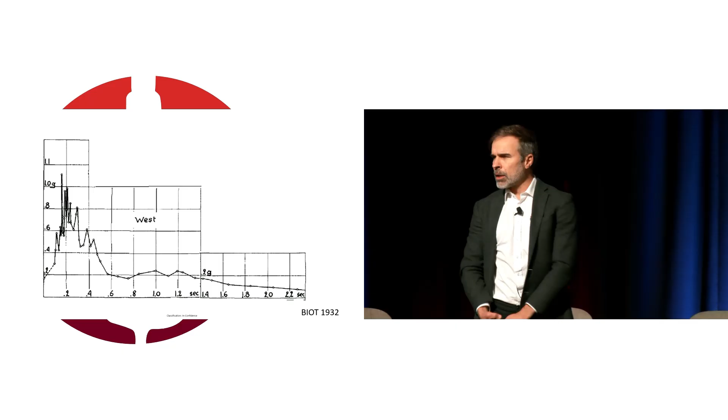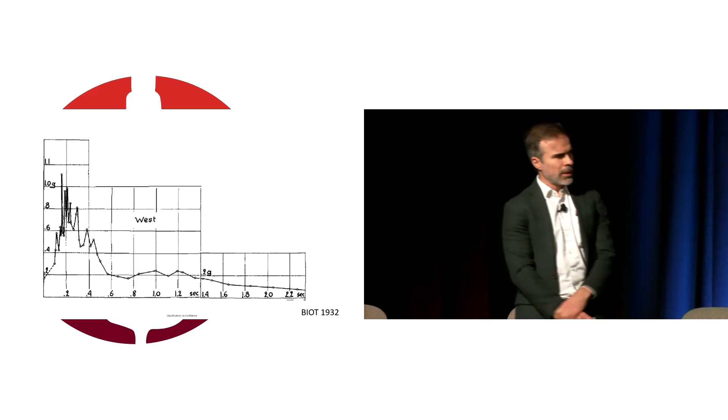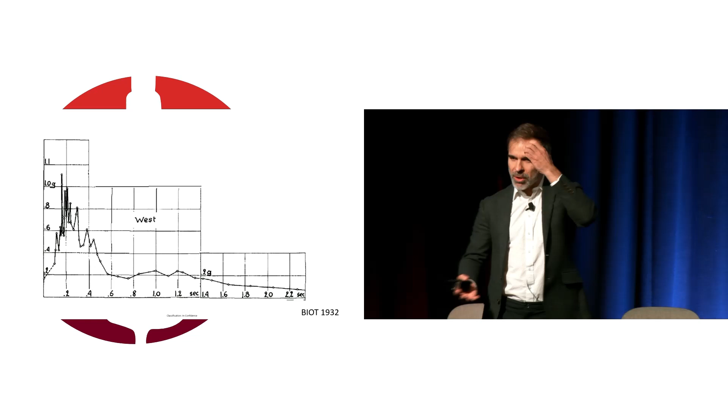At about the same time, or a few years later, on the other side of the world, in California, at Caltech, they discovered, so to speak, the earthquake spectrum. I would like to think most of us here are very much familiar with it. Well, there are really three spectra we should think about: the acceleration spectrum, which I'm showing here, the velocity spectrum, and the displacement spectrum. But the one that most of us look at, the one that was first introduced and most people pay the most attention to, was the acceleration spectrum.

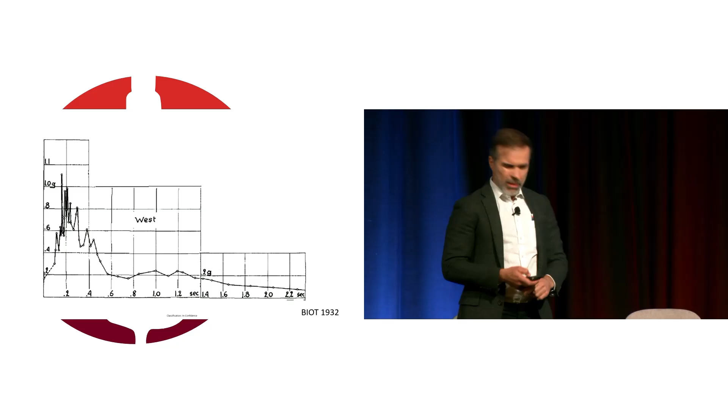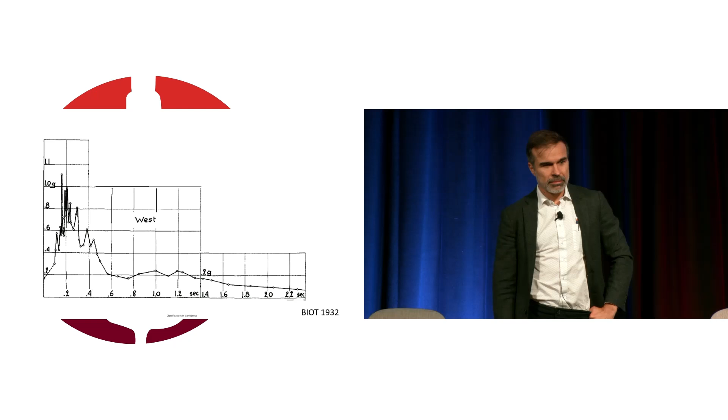And in that sense, that's a tragedy, and I'll explain why. But the idea was, look, as the period gets longer, you get less acceleration. That must be good, the Californians thought. Well, that went in the exact opposite direction of what Naito said.

And that went on for a while, to the point that the first codes in America said precisely that: make your structure flimsy, so to speak. I don't want to say flexible, because flexibility gets mixed up with deformability, and those are two very different things. Flexibility is the inverse of stiffness, and that refers to the initial slope of the load deflection curve. But that's very different from deformability, which relates to how far you can push, bend, or distort something. Those are very different concepts.

And God, even when I go to Wellington and I get on an Uber, I'm always tempted to ask, aren't you worried about the next earthquake? And very often they start teaching me and saying, oh well, no, our houses are very flexible. That's good.

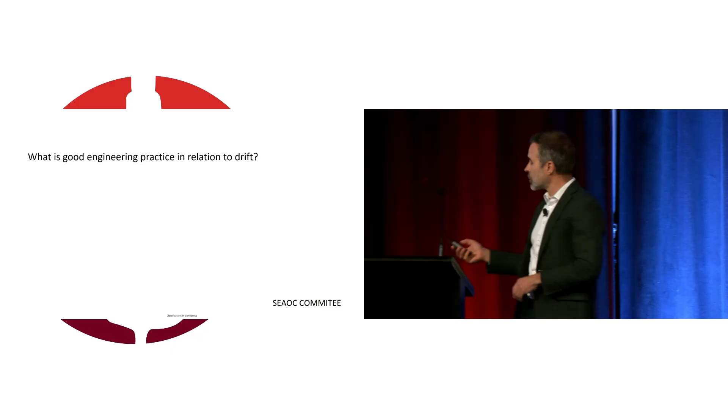Before that, this same committee in California was asked, when they proposed this idea to concentrate on forces and have this minimum base shear, they were asked, what about drift? What about deformation? People had heard of Naito and his ideas. So they said, oh, we entertained the question of drift. We thought about three things in relation to drift: health and safety, non-structural elements, and something they called motion sickness.

As if a building in an earthquake was something like a boat. Nothing like that. Anyways, they say very interesting things.

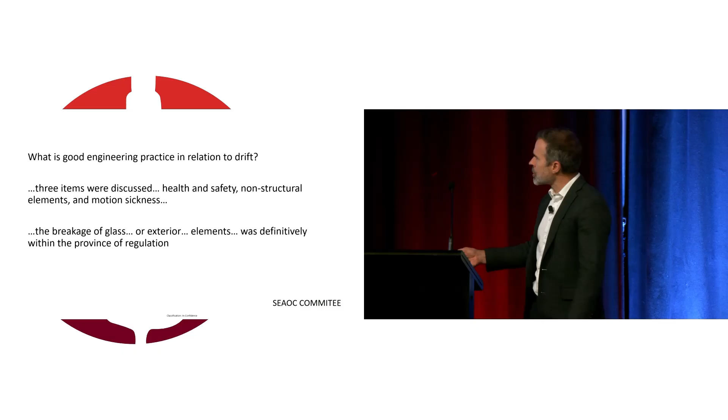This is a report that came along with the building code. It says, well, yeah, if there's too much drift, the glass might break, and things from the facade might fall, and that should be regulated because that might hurt someone. But other than that, these other ideas that you need to protect the non-structural elements.

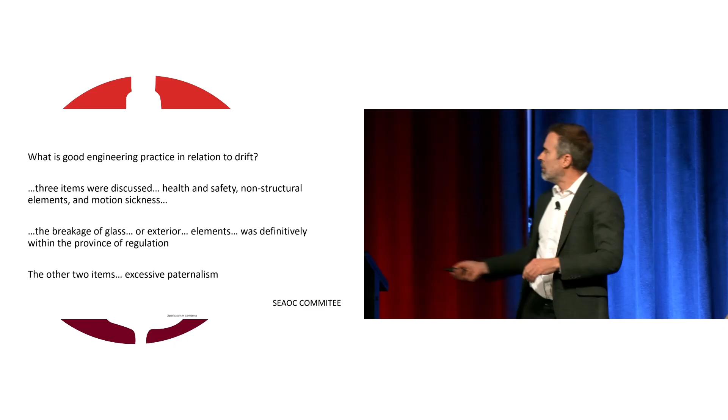The first keynote yesterday was talking about protecting the asset, protecting the investment. And this other thing about what people might feel or not, that's excessive paternalism. We don't need to worry about drift. And in fact, they say right there in their commentary, we're not going to say anything about drift or deformation in the code. That doesn't belong to the code.

And as I was indicating earlier, that kind of thinking went on for quite a while. This quote says lateral displacement is seldom critical in a building. That quote was given by these very smart, very important people who made a big difference in our profession, as late as 1961. Forget drift.

It took until 1980 or so, although the exact date for the reference is 1981. This citation refers to something that was presented in Istanbul, by this guy, Mete Sozen, who in 1980, at the World Conference in Istanbul, on the basis of experimentation, made the case that we actually have to pay a lot of attention to drift and deformation, or displacement, whatever you want to call it.

I wanted to show this picture because it shows the level of deformation to which they subjected these models of buildings. And I also wanted to show this picture because I always find this portrait of Jack Moehle, whom you might know, very amusing. Yeah, those were different times, eh?

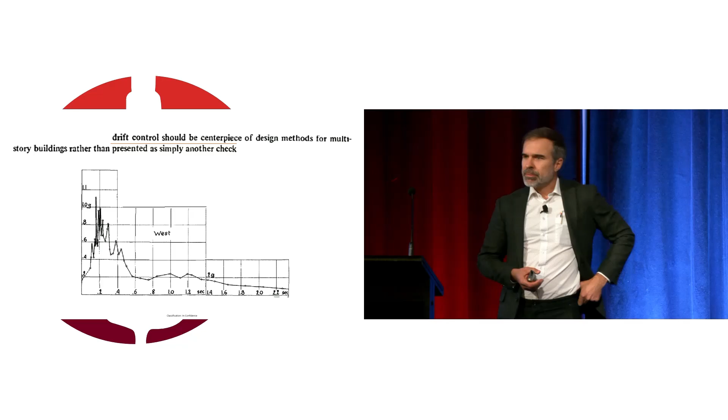In a way, what they were saying is that, yeah, we've been looking at the acceleration spectrum thanks to the amazing work by Biot and so on, but we should, in fact, be looking at the displacement spectrum, because displacement is what drives damage. It's the distortion that drives damage. That's what breaks the stuff that the insurance company has to pay for all the time.

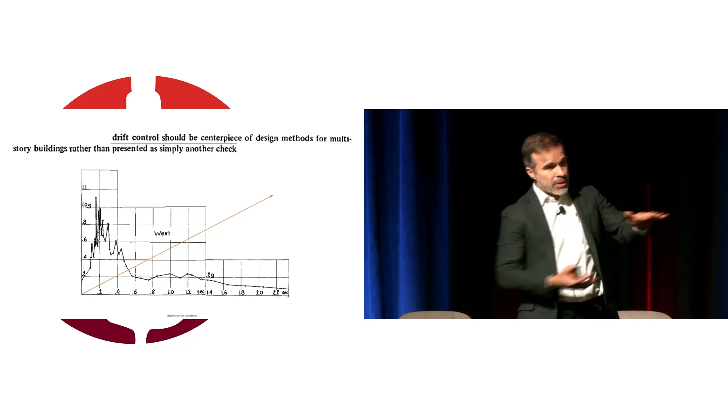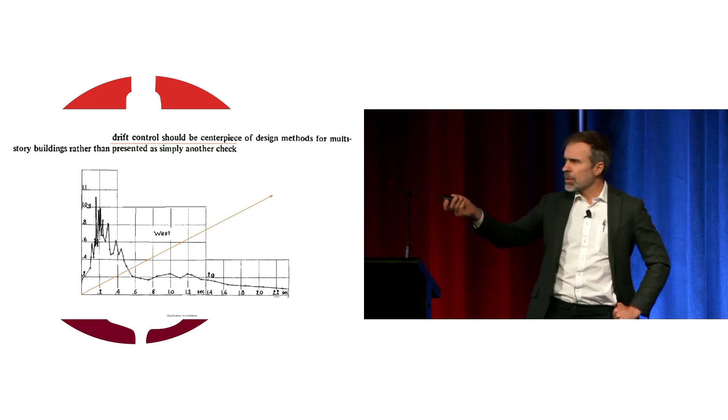In a way, what they were saying is that, yeah, acceleration may be decreasing as you increase period, but the displacements do the opposite. The flimsier your structure, the longer its period, the more it distorts. And that means the more likely you are to get into trouble, in terms of what may happen to the structure, and certainly the more likely you are to get into trouble with all these expensive finishes, facades, doorways, and so on.

I'll address the issue of the acceleration-sensitive components in a moment. But for now, let me just say that this idea kind of caught on slowly, but it did catch on. And by now, there are at least two books out there that speak of displacement-based design or drift-driven design.

But even more interesting, there's been a lot of evidence that we've been looking at, that we've been collecting, that supports this idea that, again, can be traced all the way back to Naito. The idea that robust, stiff buildings do well. And Mr...

Lucas from the Insurance Council was asking for evidence that we can design better so they can lower our premiums. There's evidence. This photo I took in 2010 in Viña del Mar. This building had already gone through the 1985 Viña del Mar earthquake, and then the Maule earthquake. We were not allowed in at first because it was fully occupied. Eventually we became friendly with one of the owners, and they showed us you could barely see cracks in the walls at all. The worst thing was one picture frame had made a mark on the wall. These buildings have done very well.

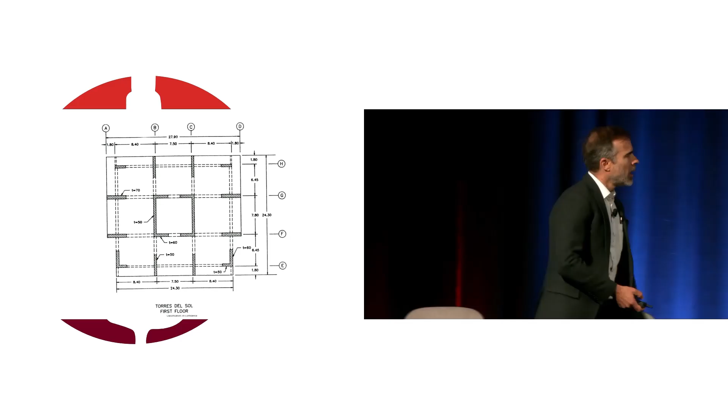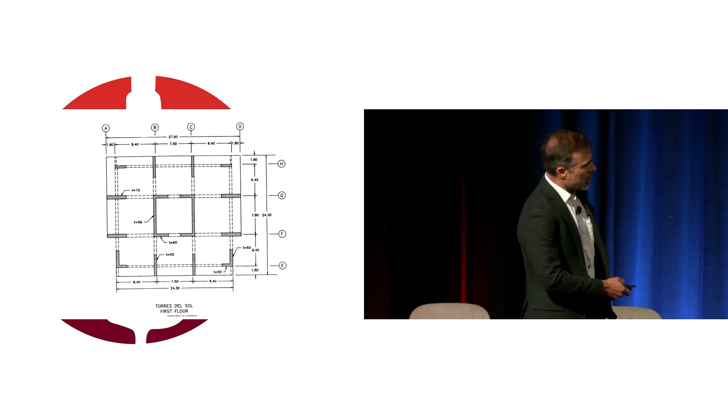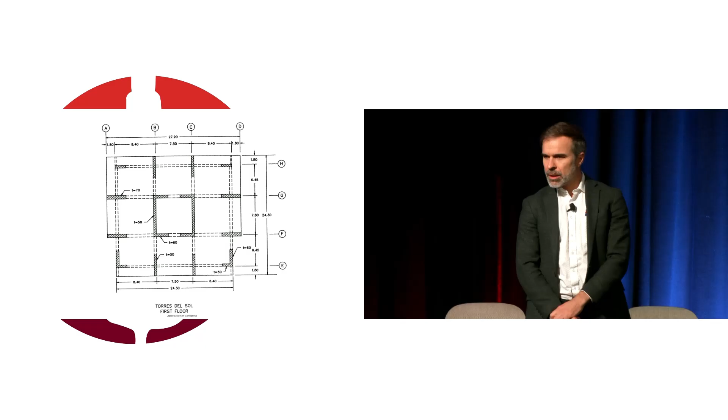These buildings in Chile are famous for having robust, stiff walls. Everything hatched in gray here represents reinforced concrete wall. I love this drawing because it shows the thickness of these walls - 60, 70 centimeter thick walls, no joke, and lots of them. So much wall that it takes 6% of the floor area of the building, 3% in each direction. But that has worked very well.

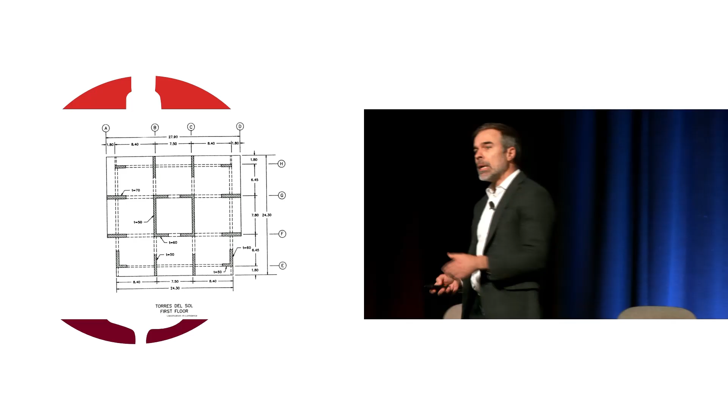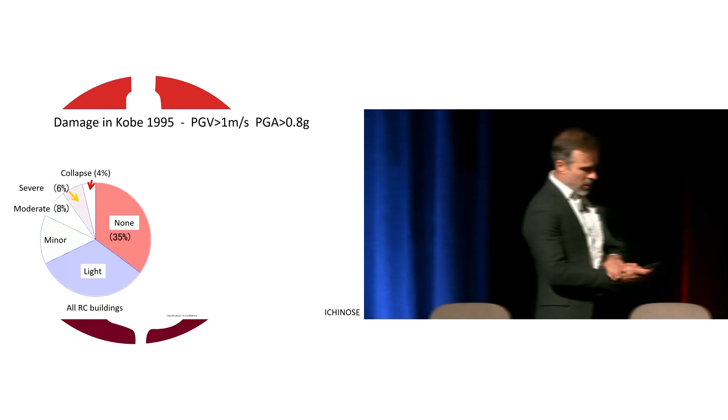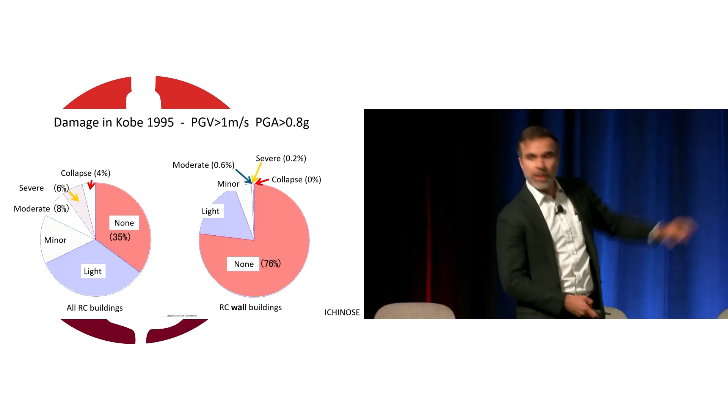It has worked very well in Chile, as Ruben can tell you about better than I can. It has also worked very well in Japan. I borrowed a slide from Professor Toshi Ichinose, who collected data related to the Kobe earthquake. It shows how much damage has occurred to reinforced concrete buildings in Kobe - these are all the buildings grouped together. He contrasts this with damage occurring in wall buildings. I think we can all agree the wall buildings are much less likely to have severe damage, or damage at all, never mind collapse. The wall buildings have done quite well.

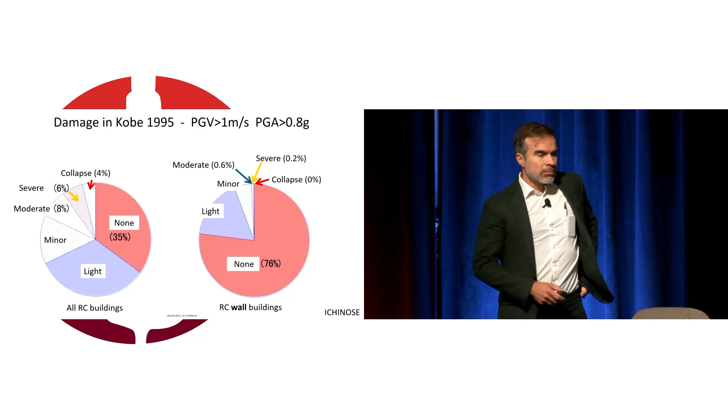This is having an impact. We're talking about functional recovery and so on here, and we have plans to change things over a fairly generous time frame. Other countries are not feeling they have much time anymore.

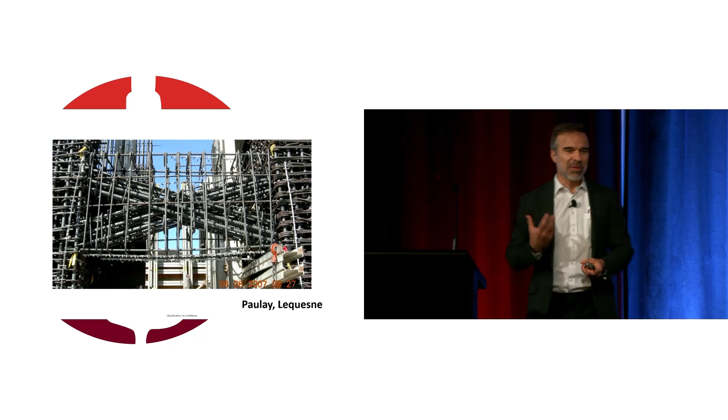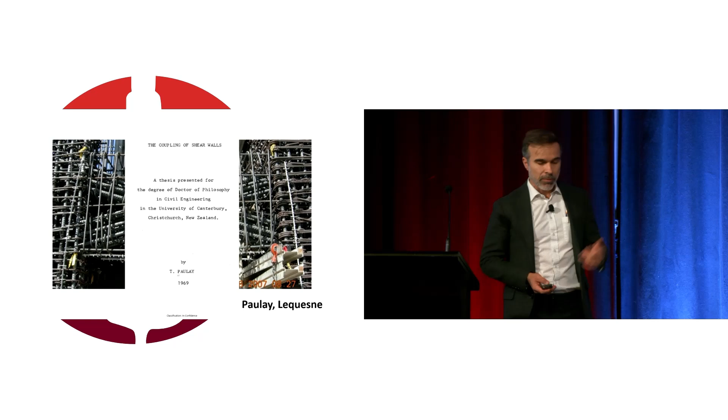But finally we did figure that out, and thanks to that, we have abundant transverse reinforcement in our structures now. I wanted to make direct reference to the work of Tom Paulay, who did a lot to improve the way in which we design coupling beams. We've done a lot to improve the response of reinforced concrete to shear, and thank God for that—I'll allude to this later. If it wasn't because of that, what happened in Christchurch would have been much worse.

So that's a second example where it has taken us a while and a few surprises to change the way we do things. I'd like to now give you another example. In this case, I want to talk about the role of strength and the role of dissipation in response, at least of reinforced concrete.

Again, Naito, back in the early 1920s, said strength is not so critical, just to have enough. That's hard to swallow, right? You think the more strength, the better. So I wanted to show you these tests done in 1979 by Dan Abrams at the University of Illinois, where Newmark worked, and then later Sozen worked too, and Abrams was there with them. They tested, in this case, two building models.

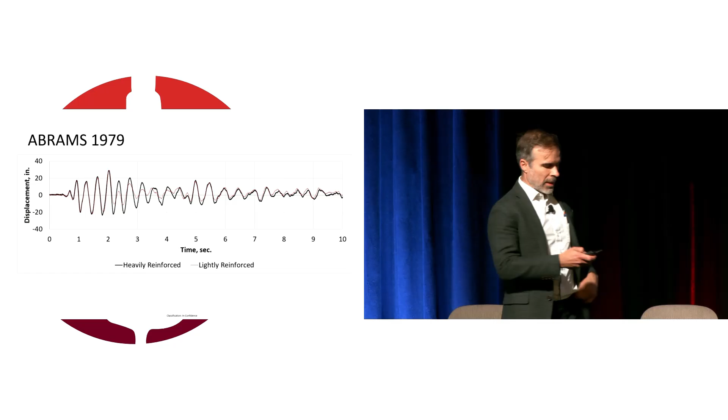Both buildings were pretty much the same geometry-wise, except one had a wall with a lot of reinforcement, and the other had a wall with 4 times less reinforcement. That was the main lateral load resisting system, one wall. One was essentially 4 times stronger than the other. Look at the difference in response - you can probably not even see it, or if you do, you don't see it very well. That's the point I'm trying to make. One building had 4 times more reinforcement, in many ways 4 times stronger. That didn't matter. The response was essentially the same.

We still struggle with that in our profession. We're so obsessed with forces that we don't quite see that often. And it still bothers me, and it has bothered many people.

In 1984, another Japanese researcher, Shimazaki, went on to test that idea with numbers, not on a shake table but with numerical models. He looked at oscillators with different load deflection characteristics. I'm going to concentrate on two of these - the one he called Model 2, and the one he called Model 4. What he was trying to do was answer the question: is it true that if I make something much stronger, the response really is not that sensitive to strength?

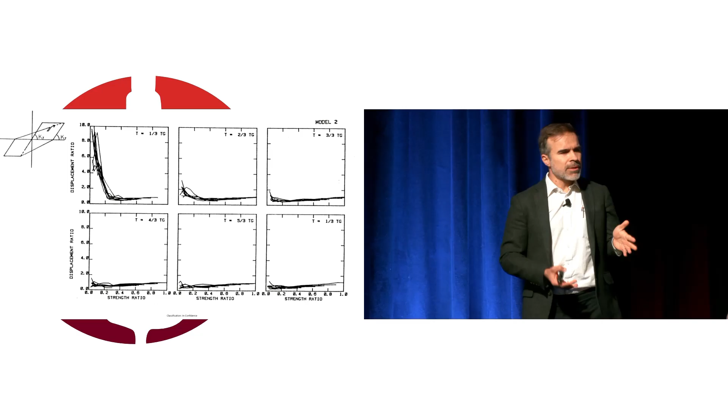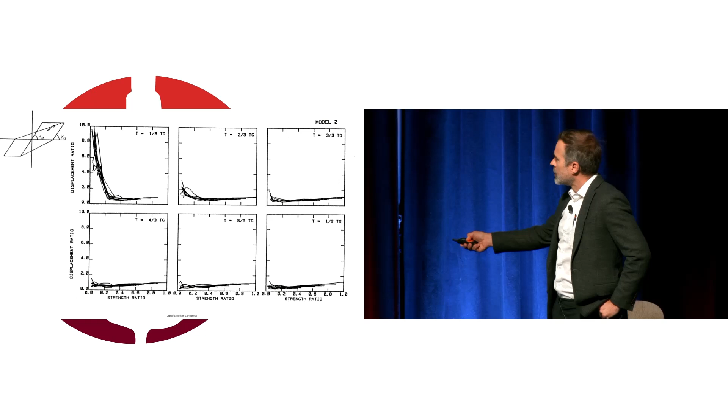Is that true? It's hard to believe. He created these very ingenious plots where the x-axis represents strength, and the y-axis is a measure of displacement. You have different plots where the variable between plot and plot is period - short period, slightly longer period, and so on from left to right and top to bottom. These plots showed Shimazaki that displacements were fairly constant despite strength varying very much from left to right, except for the oscillators with very short periods.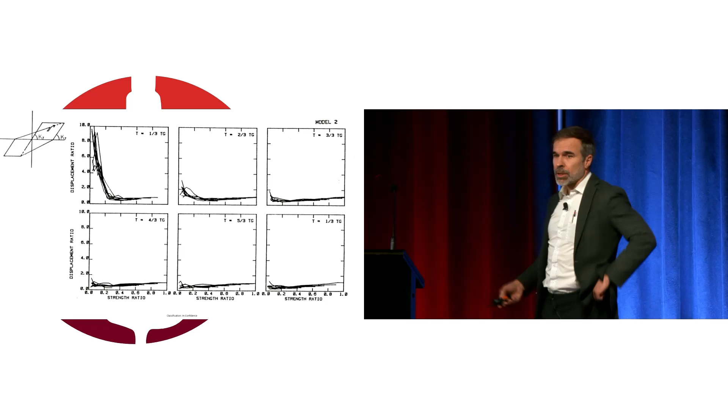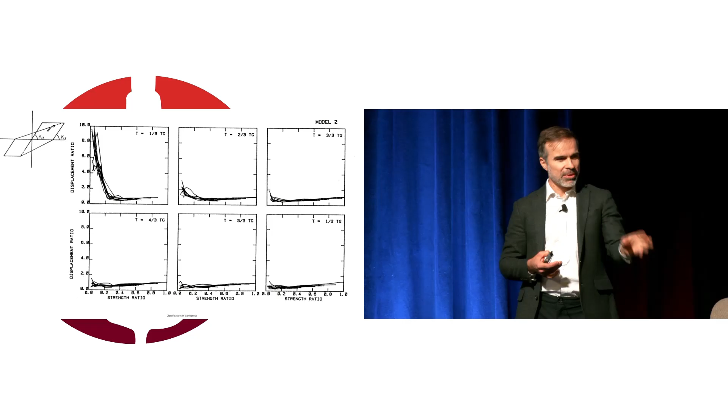So strength didn't matter, except for the very short periods. That is why, until very recently, what we did with short periods was different. Remember, we divide by k-mu and multiply by something else - we multiplied by mu. For short periods, k-mu and mu are different. Well, they used to be. Now, in the new TS 1170.5, that's no longer the case. I'm not very comfortable with that, because what happens in very short periods is different.

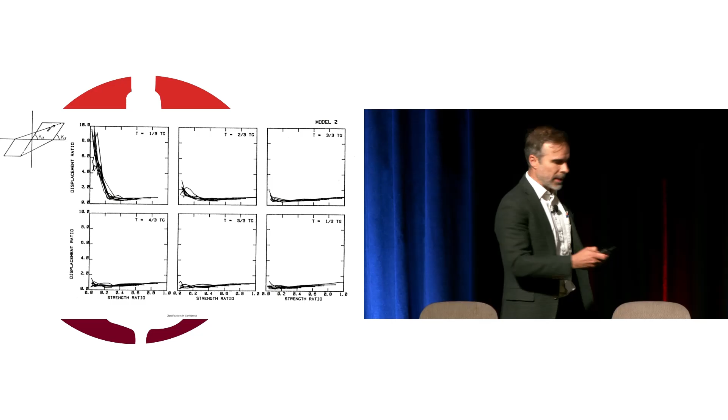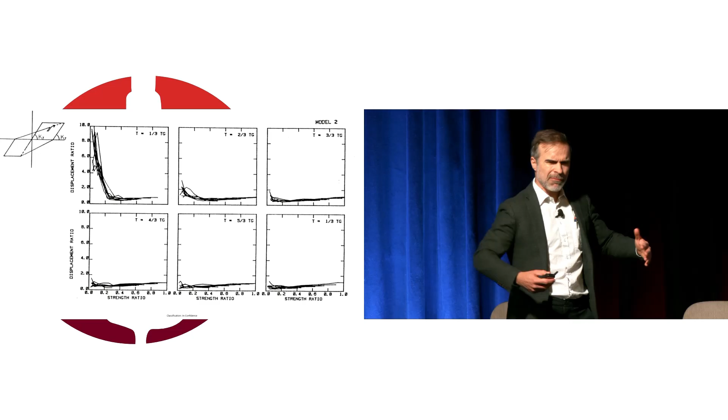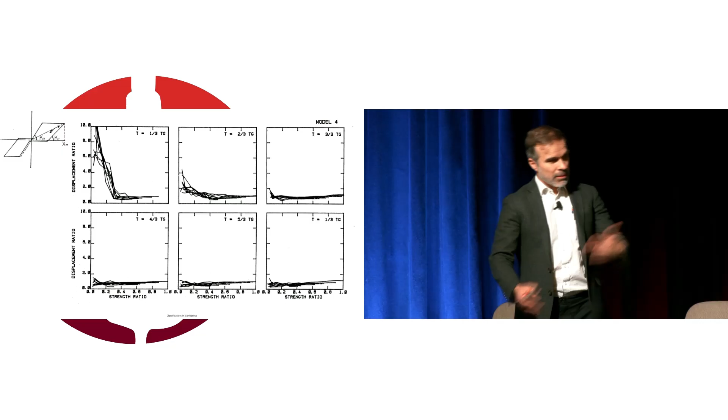But never mind that - for a wide range of the domain of possibilities, strength is fairly unimportant, like Cross said. This is what Shimazaki saw for this type of oscillator. I want to show you what he saw for the other type, Model 4, which had a lot of what they call pinching - much less fat loops, like this. This is oscillator 2, this is oscillator 4. Not much difference. One has very narrow loops, and the other doesn't.

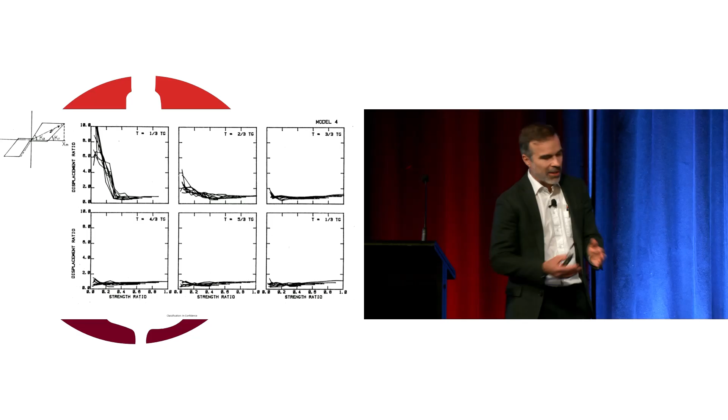This was later confirmed by Nigel Priestley. Don't get me wrong, dampers are great - I'd rather have the fat loops than the narrow loops - but they're not always as useful as we think. That's another surprise that has come about through years of research.

Let me summarize these initial cases by saying that as long as there is good detailing, which took us a while to realize what that meant, demand is best expressed in terms of deformation. That's sort of the essence of these back-and-forths and trial-and-error exercises that have led us to where we are right now. But that refers to deformation demand.

Now I want to switch to the other side of the equation, deformation capacity. For deformation capacity, when I went to school, they taught us to think of these things called plastic hinges. If you dig, the concept of plastic hinge is actually quite old - it was first introduced in 1954 by McCollister and Siess, again at Urbana, Illinois. The essence of the idea is that if you have an element like that, with shear and moment and so on...

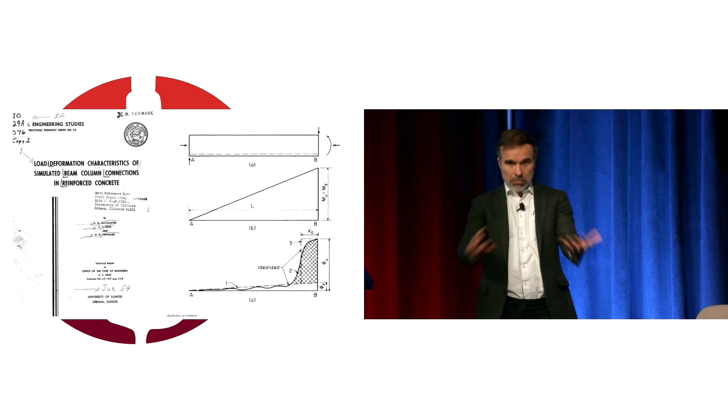You might have a moment diagram like this, but your curvature diagram will have a region where bending concentrates - a region where things yield and become plastic. We call that the plastic hinge, and everyone in this room has heard of plastic hinges. Everyone who has ever opened a structural or earthquake engineering book must have seen this equation describing how a plastic hinge works. Those of you who have been in my classroom might realize this actually has to do with the second theorem of the moment-area theorems. This is based on mechanics that at the moment seem hard to argue against.

Geometry. Strain divided by distance to neutral axis gives you curvature, and again, the theorems help us go from curvature to deflection. Hard to argue against all of that. Well, here's another surprise.

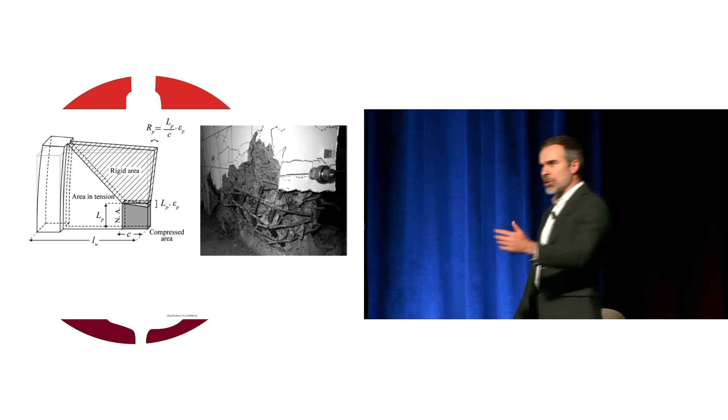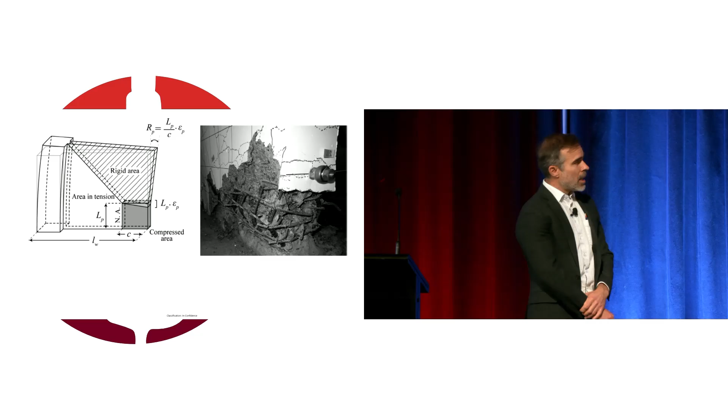After the Chile earthquake of 2010, people noticed there was a lot of concentrated damage at the bases of walls. And once again in Japan, Takahashi and Ichinose were wondering what happened. And they did these tests.

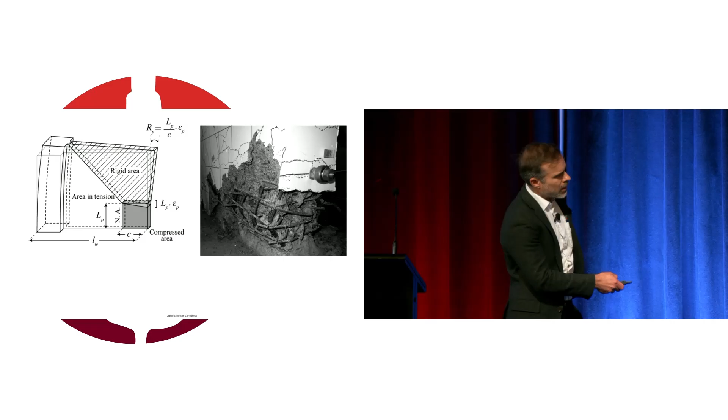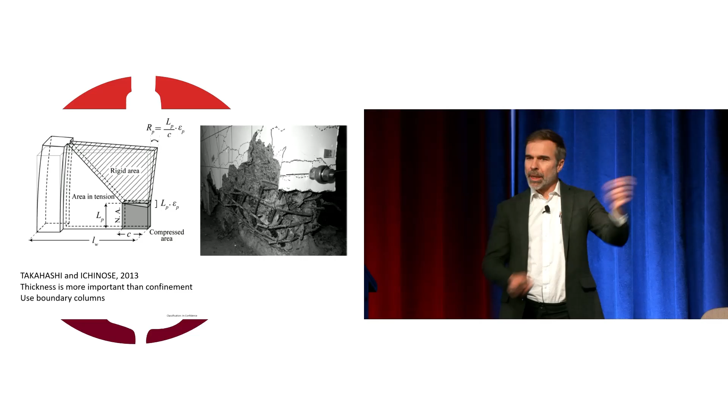They observed, again, a lot of concentrated deformation at the bases of these walls. And they produced this cartoon in a paper they published in 2013, where they say, well, on the side of tension, yes, the plasticity may be spreading over a long plastic hinge, if you will. But on the side in compression, the plasticity is not spreading. It's concentrating. And that area seems to have to do with the thickness of the element there.

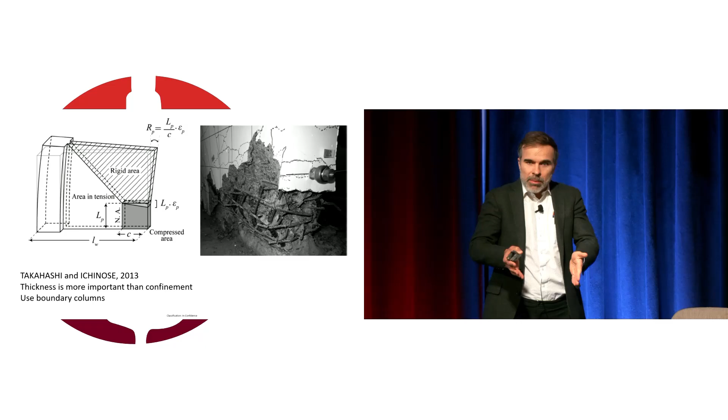Ha! We never thought of that until 2013. So in that sense, this wasn't working at all, according to Takahashi and Ichinose, because we always thought this quantity that we call LP, which refers to the length of that area of plasticity, we always thought that's related to the depth of the element, not the thickness. I mean, we're sort of an order of magnitude off there.

And sure enough, if you look at measurement in the y-axis versus calculation based on that equation, things don't look very good, do they?

There are many reasons. The initial tests by Mattock were done on beams tested in one direction. There were no cycles, those were beams. Now we're looking at walls, and the walls are subjected to cycles. And the mechanism of failure can be anyone's guess. Bars buckle and fracture under low cycle fatigue. Sometimes the wall sort of buckles out of plane. There's so many things going on beyond what the equation that we put our trust on is based on.

And people have been trying really hard to address that. These are pictures that show all the things that were tried by Carlos Arteta and Jack Moehle, who came back from Chile saying, shoot, the plasticity isn't spreading as we thought. We need to figure out how to make the compression zone longer. They tried all these configurations in elements subjected to compression to try to spread the plasticity, so to speak.

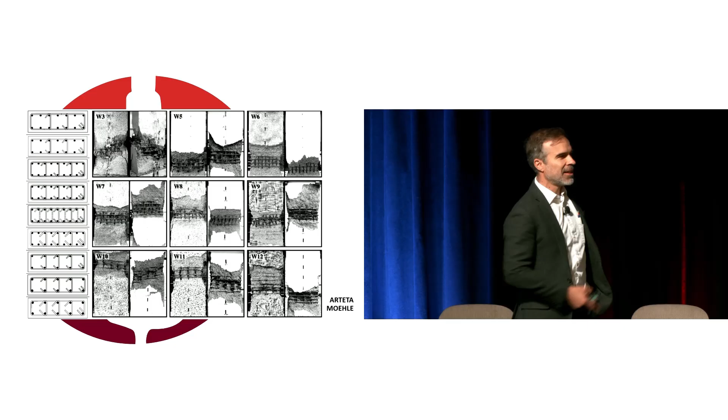Didn't work. In every test that they did, the deformations in the compression side of the wall concentrated. And that's why today, when we try to calculate the deformation capacity of things, we don't use mechanics anymore. This is kind of embarrassing. We use regressions. That's a regression.

Very good regression. Nothing wrong with the idea of regression. In fact, it's a little bit embarrassing in a way. When I was in my master's, I had to write a thesis about deformation capacity of columns. And I didn't know what to do.

So the easiest thing for me to do was to try to figure out some parameters that seemed relevant and run a regression line. And I submitted that with my eyes closed, saying, I'm going to get a lot of heat for this. I expected my supervisors to demand mechanics and geometry and so on. They said, great, this is cool. And we wrote a paper. Then it didn't get rejected. And then, yeah, you know how that feels, don't you?

Other people looked at the idea, and then they introduced more parameters, and they made the regression bigger and better. Thank God they don't cite that initial paper we wrote, they cite the other papers that came later. And I say thank God because it is embarrassing that we cannot solve this question with mechanics, but we have to solve it with regressions.

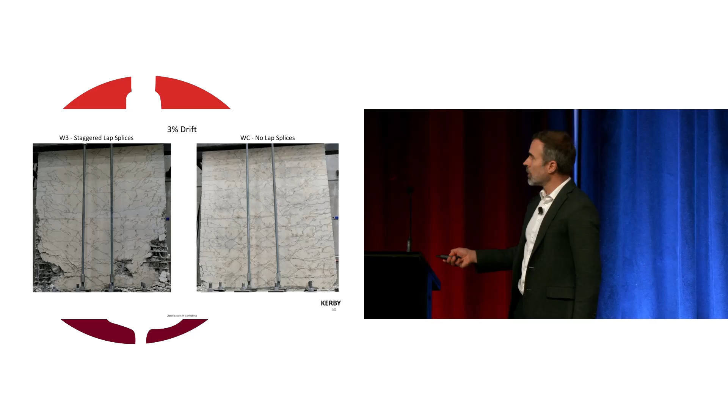What a mess, and it has consequences. These are two of the walls tested by Charlie, one without lap splices, one with lap splices. At the same level of deformation, completely different damage. We don't want that in our building. That's not very easily repairable.

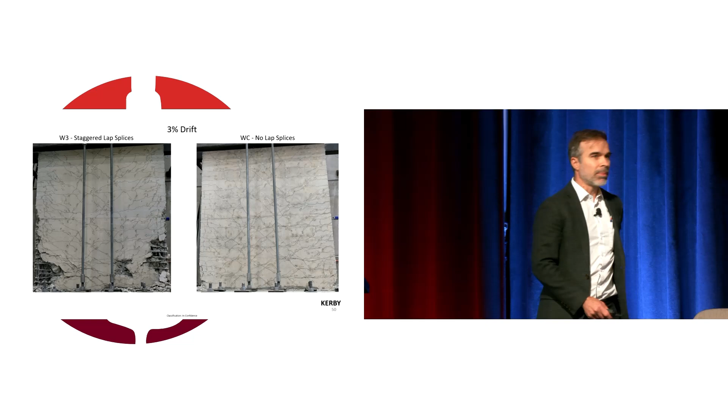As Ken said yesterday, you can repair anything if you throw enough money into it. So yeah, but that'll be a tough repair. That's an example of the kinds of surprises we've run into on the structural side of things.

At least from my biased perspective, I thought I should go a little bit beyond structural engineering, or at least reinforced concrete, and talk about other things. Please give me the benefit of understanding this is not my specialty. I was trained in reinforced concrete, but I do notice that in terms of ground motion, we've run into a whole bunch of surprises too.

To begin with, plate tectonics was only generally accepted in the 1950s or 60s. Just think about that. In that sense, what we do is fairly recent.

We talked about spectra, right? I showed you the first spectrum ever produced by Biot. In the 1950s, Newmark organized ideas about spectra with the famous tripartite plot that most of you must have seen. It's very hard to understand how to read the tripartite plot, so if you didn't bring your tripartite goggles, let me help you there.

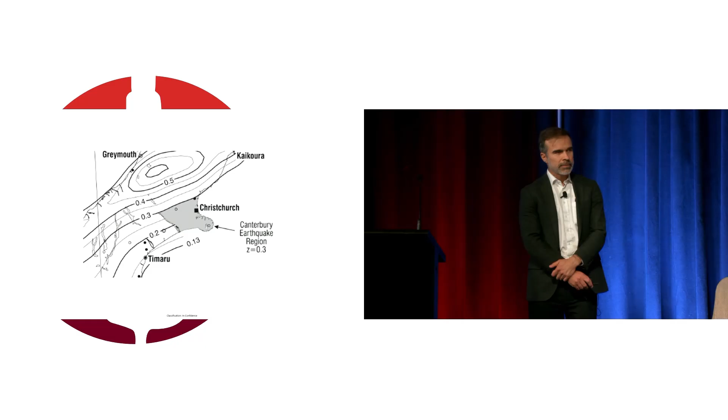And then there's the issue of it was higher than expected. We all know what that feels like, right? Higher than expected. What bothers me is that it keeps happening.

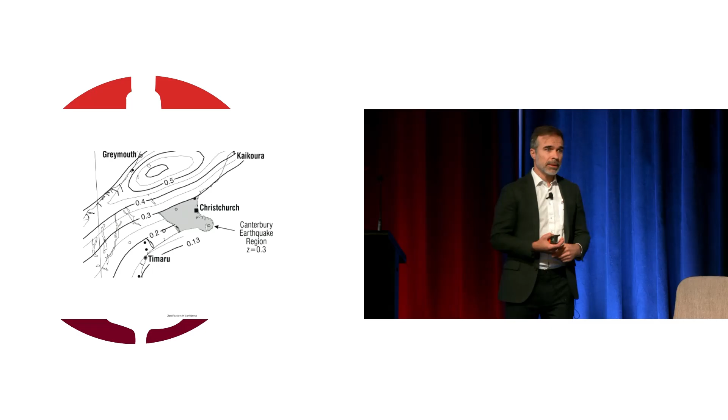Maybe it shouldn't surprise us, given what I just showed you about our records of PGA and PGV and how they keep increasing. There was a very good paper by Strasser recently that says essentially we're going to keep getting surprised because we don't have enough instruments even now to measure all the possibilities. So the more we measure, the more increase we're going to see in our maxima and in our estimated hazards too. And this suggests the same.

Much higher than expected. In Japan, in 2010, they looked at 400 years of historic records. And they figured most of the earthquakes that have affected the north of Japan, the area of Sendai, have been magnitude 7, magnitude 8. And that's because we have ruptures that can occur of certain length, and that makes sense and so on.

2011 comes, not one of those ruptures occurs, but two ruptures happen at the same time. And they don't get a magnitude 8, they get a magnitude 9. And all of you know a magnitude 9 is 32 times more powerful than a magnitude 8. Needless to say, what was estimated initially was quite the underestimate.

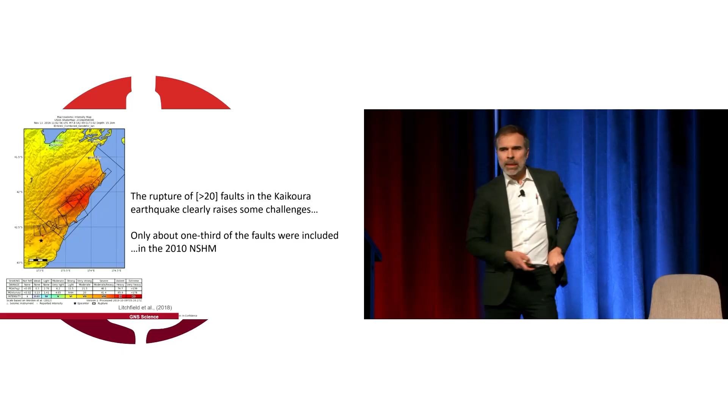And of course, that has happened very close to home too. In the Kaikoura event, 20 or so fault segments ruptured. I was talking about this with Brendan Bradley the other day, and he said, yeah, we knew most of those segments were there. What was really surprising is that they all ruptured at the same time.

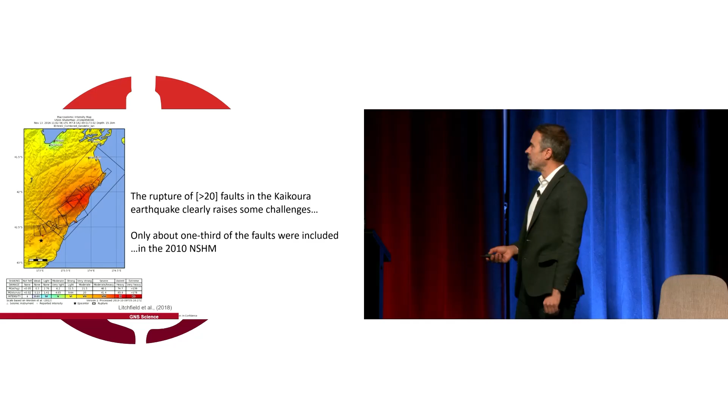Another surprise. And then to wrap these things up, so we can share some questions, let's also admit that because maybe of all these surprises, we're having to change the way we look at things. Also because of what we perceive are the expectations of society. We have realized we don't have to, or we cannot, design just to avoid collapse. We need to design to avoid disruption.

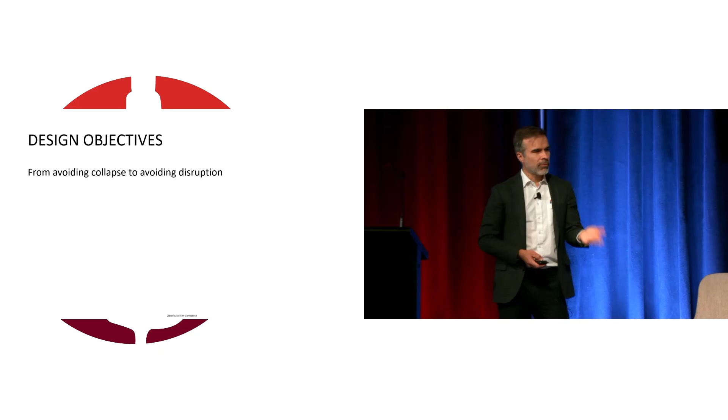Our dear Christchurch is, of course, a very good example of that. Two collapses in an earthquake that exceeded all expectations is a fairly good record. I think we need to thank Park and Paulay for all the effort they invested and all the research they did to teach us how to do better detailing, because I think what saved these buildings was the detailing.

Except, again, for two rather unfortunate exceptions where things were not done the best way. The idea is that ductility saves lives, but it doesn't save the investment. We need to control drift and deformation to control the investment.

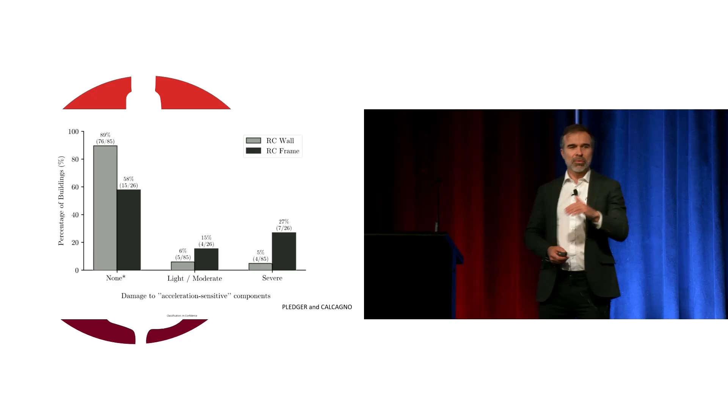This comes from Chile, from Renato Calcagno, whom we've been collaborating with. This is a very interesting plot that Ruben alluded to yesterday. This is percentage of buildings, and this is level of damage in ceilings and sprinklers and so on. We have two types of buildings, wall buildings and frame buildings. What I want you to see is that bad damage to ceilings and piping is more frequent in the frame than in the wall. The wall building, at least in Chile so far, has done better in terms of non-structural damage to things we think are acceleration sensitive.

And Ruben alluded to many possible explanations, non-linearity, maybe a little bit of slip on the foundation, or we don't know. Talk about a surprise. It's hard to believe.

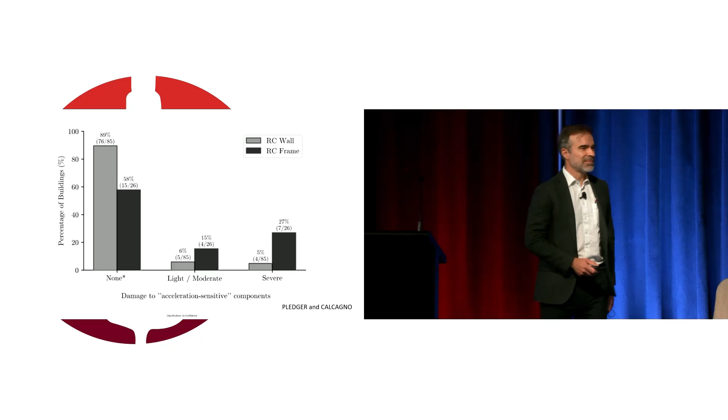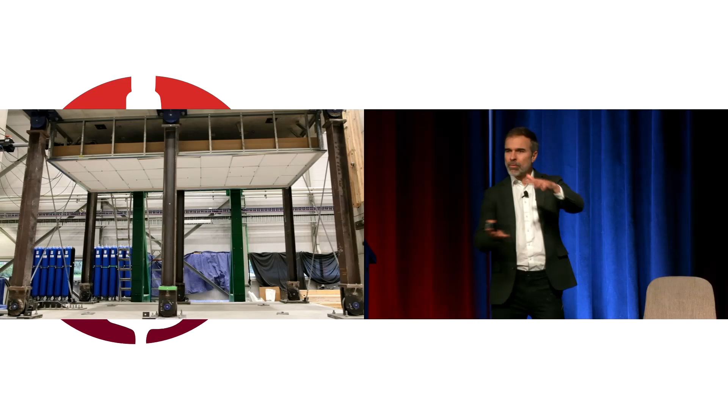So hard to believe that we're running our own tests at the University of Canterbury. We have this brand new simulator where we can move floors independent from one another to try to understand what happens in a... did it play kind of choppy? Oh, that's too bad. Oh, there it goes.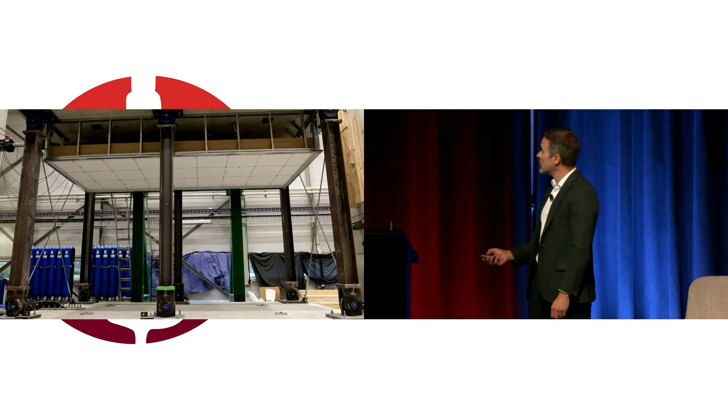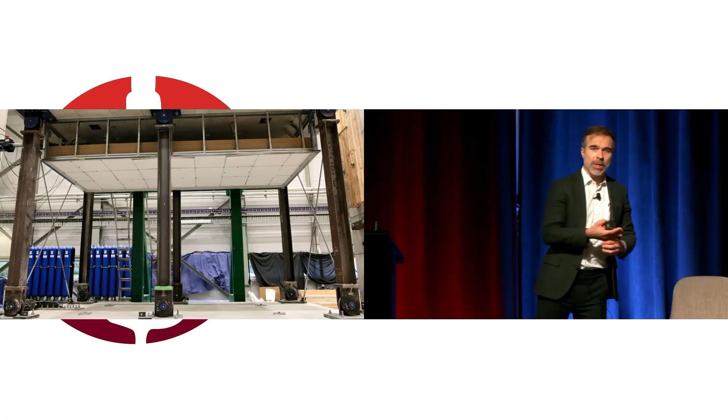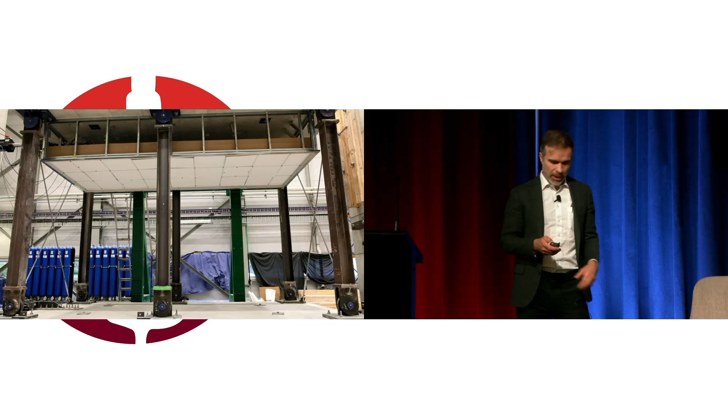So we're trying to simulate what happens in a given story in a high-rise building without testing the high-rise building, to test the idea that in a stiffer building, the acceleration-sensitive components get damaged more or not. That's what we're trying to do in uniaxial fashion in this case.

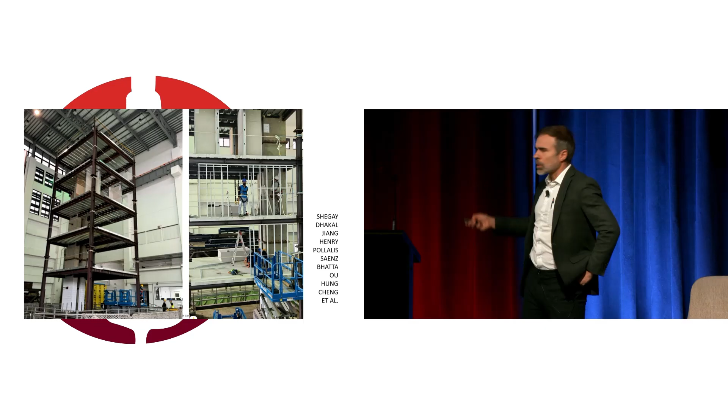In triaxial fashion, in a test we're going to do, and this is a collaboration of many of us in QuakeCoRE. This is a test we're going to do in Taiwan soon, and we have every possible type of non-structural element, the latest partition technology, brackets to support sprinklers and so on.

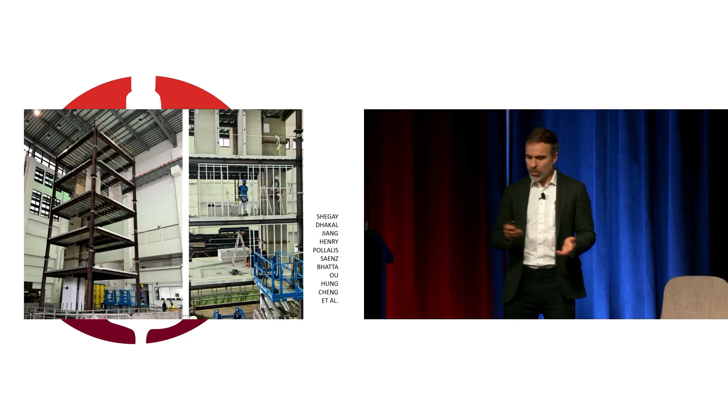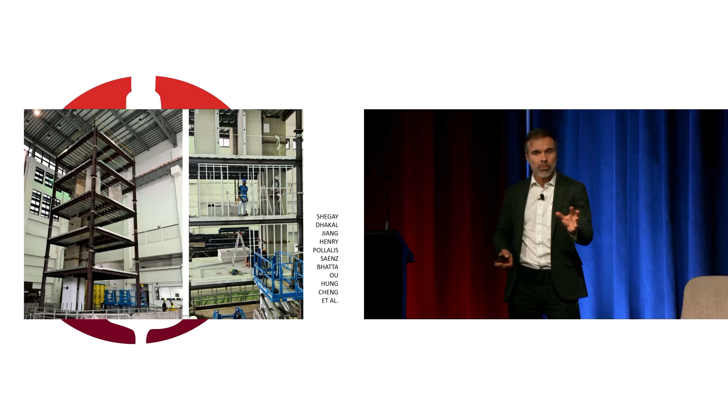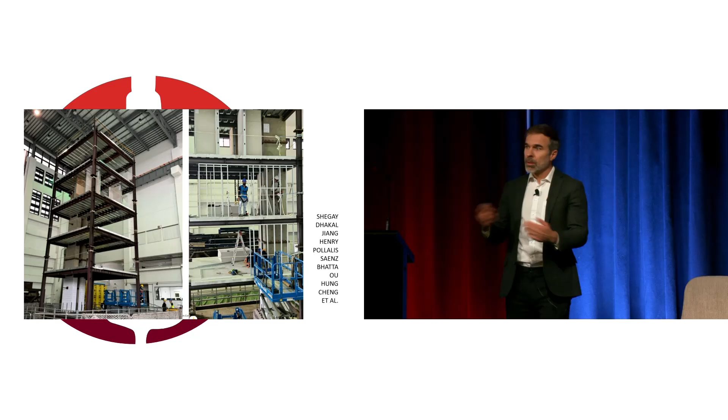And the idea here is, in this building that is quite eccentric, I admit, we have the option to put in or take out braces on one face of the building, and with that we're going to control not only the torsion but the amount of drift that occurs on one side. We want to see if the stiffer structure with less torsion produces more or less damage in the non-structural elements. Almost done.

So we have many challenges that I think force us to collaborate. We need to figure out what we're going to do with all the buildings that were built out there before we realized many of these surprises. And that's not just the job of structural engineers. That will take interdisciplinary work, no question about that. Inevitably, we need to fix some of these buildings, and we need to figure out how to do that in an easy, affordable way.

There was a lot of talk yesterday about functional recovery. That's all great, but it looks at the building as a separate, isolated entity. I think Laurie is right, we need to think of functional recovery of the entire system. My building might be okay, but if the building next door is leaning towards my building, I don't have functional recovery. In many ways, we need to think of this in a bigger scale.

And that's going to take some money, and we can talk about the cost of making buildings better. I have backup slides because that's sort of the default question. But I really like the idea of these bonds and the idea of capital planning to avoid the controversies about policy. There's got to be a way to help the owner who got stuck in a bad building and doesn't have a way to pay for the fix. And I'll tell you what, if we don't help them pay for the fix now, for the retrofit, we'll pay anyways, eventually, more after the earthquake. We can talk about figures I have about that.